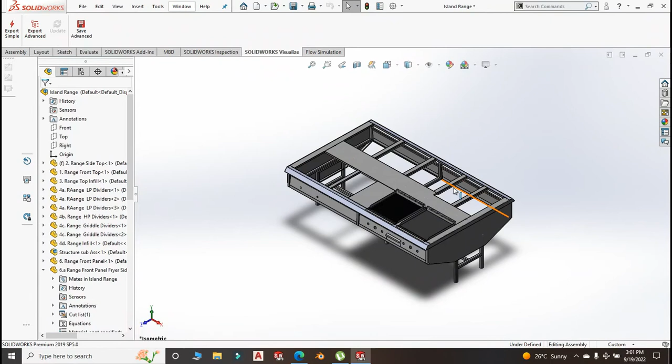For those that are new, we have been dealing with our layout. You can check the previous videos. We are at the hot kitchen, and we are designing this cooking range. As you can see, it's a series of videos, and we have done a couple. We are continuing with the same range, and for those that have been following, you notice a few changes here and there, like these openings were not there.

These are for the gas taps and the opening for igniting the burners and all that. This is a drip tray collecting the oil. I will revert back to whatever you're not seeing, and we shall talk about it.

Today I want us to talk about the double well deep fat fryer. The opening for the well for the fryer is this one, and we are going to be designing the fryer. If I could go to evaluate and measure, we see what is the size. I believe it should be 600 by 540. Measure normal distance is 600 by 540, I believe.

It is always good to be sure of what you're doing. Yes, 540. So having confirmed that, let us go ahead and start with the fryer. We are going to open a new file, then go to part, new part, click OK. My custom units are millimeters, grams and seconds. I've been using millimeters, so we keep that.

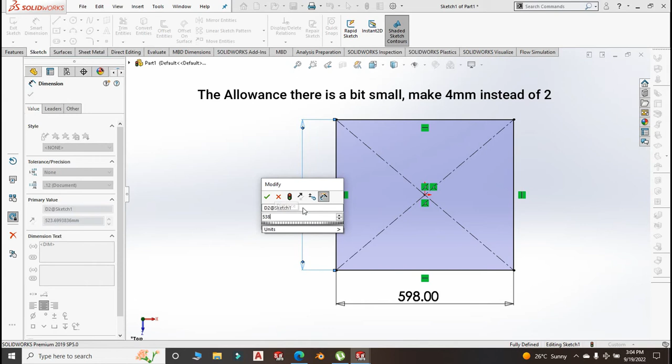Now since the fryer is a drop-in and it's not going to be welded permanently onto the cooking range, we have to make some provision on how it will be supported, and we are going to make an edge flange from here to here. We could smart dimension this. This is 30 millimeter. Also to the front, 30 millimeter, and the other side also 30 millimeter. From the back we leave it as it is.

Now since it is a double well fryer, let us do the partition. The sketch you are seeing here is for creating relationships when we start with the base flange. I did a center line from the origin, then created another line and smart dimensioned it to 15 millimeter. Then I choose the line and mirror it about the center line. Click OK and exit the sketch. That sketch is for the purposes of creating relationships.

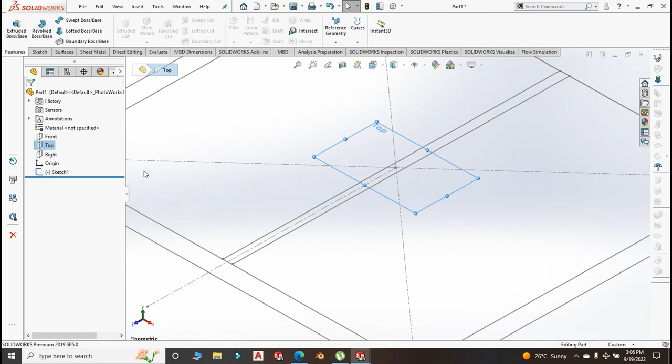Now go back to the top plane. If you want, you can create a reference plane; if you don't want, you can leave it as it is. Once you choose your top plane, start a new sketch. Choose corner rectangle, snap it from that corner to this corner. Then go to sheet metal and choose base flange. In material parameters, thickness is 1.5. The other factors remain the same. Right click to exit the base flange.

Then go to edge flange, choose this edge and this one, and create an edge flange with end condition blind. The depth of the wells will be 200 millimeter. Right click, then again edge flange, choose this edge, that direction, click OK. Then edit the sketch so that you make it collinear with our initial sketch, so that that bend becomes 30 millimeter.

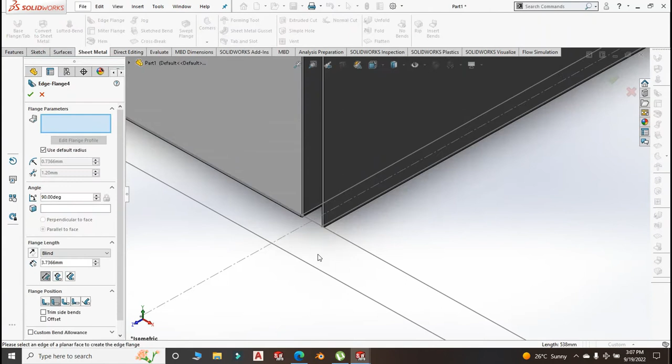That being done, we go back and do edge flange. Here we are creating the wells, and the size of this is 200. If you want, you can select edge flange up to vertex, then choose the appropriate vertex, which I believe is this one. But since we have given it blind and a dimension, that would be okay. The other one, you don't have to worry about dimensioning. Just do a flange, then edit the sketch and make that edge collinear with this. Make them collinear, exit the sketch.

Again, edge flange. We have so many edge flanges we are making here. This you can give a dimension of 200. You want the wells to be uniform. Then do an edge flange on this side.

Don't worry about dimension again. The first stage is helping us with the correct relationships, so that we may keep the dimensions of the fryer. Exit the flange.

Now I think I should have edited it and created the 45 bend that's supposed to be here. I don't know whether that is 45. We can always confirm whether this is 45. It is not 45.

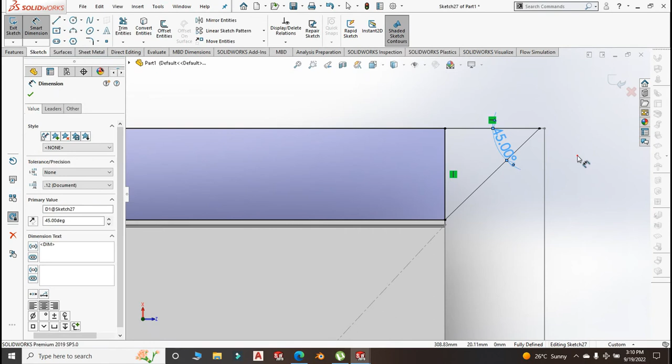Yes. Let us delete this relationship so that we may give it a 45 degree, otherwise we will have problems when we are doing the front part. Yes, that looks better. Okay, so having done that, choose this line and make it construction, then exit the flange, exit the sketch, and your flange is good.

Now choose edge flange again on this side, and this also make it 30 millimeter. That bend that will be there. And finally edge flange here of 15 millimeter.

Most of the time we have been finishing our flanges with that 15 millimeter. So edit this sketch. Do you have to edit? Now create a new sketch here. We want to notch this part here.

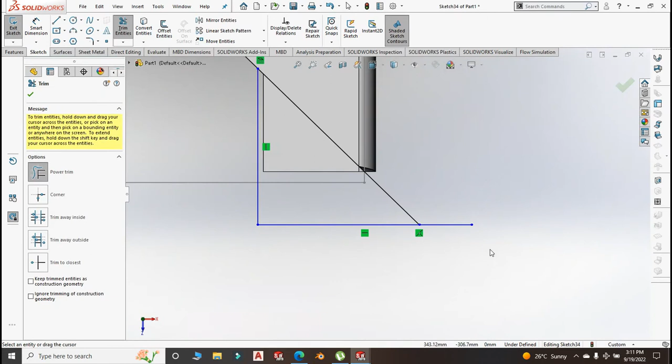You can choose convert entities and choose this edge, not that face, but that. We need the edge, we need only that edge. Right click, then draw a line, select a line from there to there, then choose extend entities, and entity to extend is that. Then right click, choose trim entities, trim this and trim this.

Once that is done, exit the trim, go to feature and extrude, and cut through all or link to thickness or something. Our notch is made of 45 degrees.

Now since we are done with this sketch, you can go ahead and hide it, then choose the right plane, go to mirror, and what you want to mirror is this edge flange, this edge flange, this edge flange, and don't forget also to choose the cut. Click OK, and all that will be transferred to the other side.

Now as you can see, we didn't have to do edge flanges here, we only mirrored what we had here, which is pretty much okay. And I can notice that something is not happening here at the middle.

Let me see. Now this is supposed to be 30 millimeter. I know what happened here, but it is supposed to be 30. I noticed it was a little bit smaller than the other edge, the other bends. Okay, now it looks uniform, right?

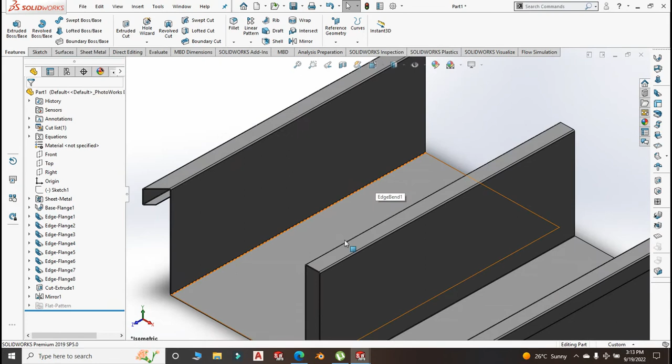Okay, now we go to this and start a new sketch. Choose a center line. Do we need a center line? We can do a center. No, we don't need a center line. Actually, we need just to do a circle.

Circle is opening for the drainage, and make this and the midpoint of this edge flange vertical. Okay, that being made, yes, we need a center line someplace. We need a center line from the origin, which will assist us in mirroring the circle.

Smart dimension. This we can do a hole of dia 20. Ideally it should be dia 25, but I'm going to do dia 20 because I have a 3/4 ball valve, and I intend to use that. Otherwise, much later we are going to make a ball valve of a 1-inch ball valve.

That being done, choose mirror, select the circle, mirror about the center line, right click, then go to feature, extruded cut, and link thickness.

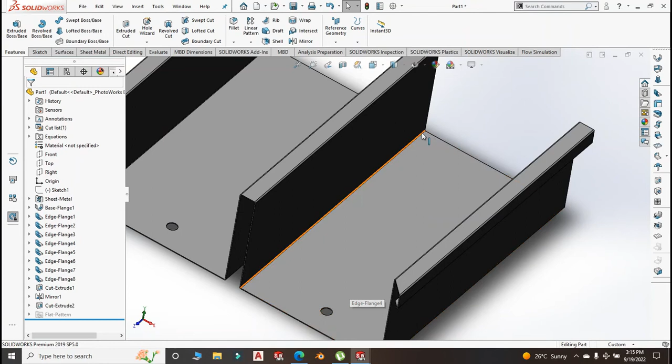The drainages are made. If you want, though this is a small thing, when you're doing your fabrication, before you do all these bends, you can create a kink here and a kink here to ensure that all the oil will be drained from the wells. Okay, but this is a small well, I don't think that will be an issue.

So we save this as part number 1. I have a folder here which I called a fryer, so I save this as part number 1 and name it fryer body.

Then I will go and open a new file and create the front panel. So I'll choose the front plane, start a new sketch, center rectangle, snap it from the origin, then I smart dimension it. This we gave it 598 and the height is 200.

That's okay. Sheet metal, base flange parameters are the same. Click OK. Let us create an edge flange there, 30 millimeter. End condition blind, 30 millimeter. Click OK. Now we edit this edge flange.

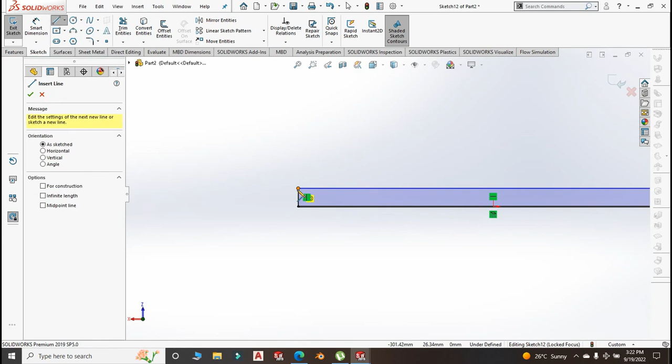Click OK. Now I do my smart dimension and maintain the size of the edge flange. It is 28.5 because of the bend allowance.

Then I make this 45 degrees, and the other side also 45 degrees.

Then choose this line and make it construction. Choose this other line here and make it construction also. Exit the sketch and your 45 degree will be created.

That is pretty much okay. Now go ahead and make the other edge flanges. This is going the downwards direction, end condition blind, size is 30 millimeter. Click OK. Then again edge flange on this side, the 15 mil edge flange, size 15 millimeter.

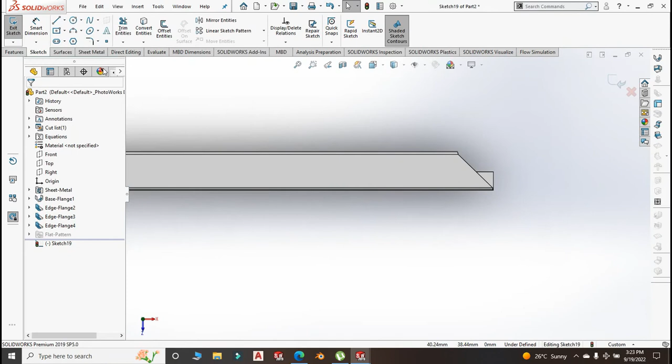Click OK. Now choose this and start a new sketch. Convert entities and convert that edge. Right click, then do a line. You can do a line touching this, like that, like that.

We want to trim, to notch this bend into a 45 degree. Extend the line, right click, choose trim, just like we did with the other one. Same procedure applies. Exit the trim and go to feature, extrude and cut.

Make your cut, and your 45 degree looks pretty good. There is something which is protruding there. I'm sure you can address that.

Now if I could go to the right plane and select mirror, what I want to mirror is that extrude, that cut. That is what I want to mirror. Click OK, and I'm sure it has been effected on the other side.

Now save this as part number 2. Call it fryer front panel.

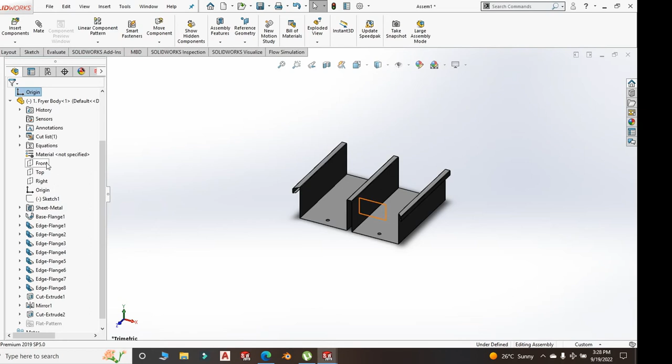We create some mates. Choose the front plane and mate it with the front plane of the working space, that is the front plane of the fryer and the front plane of the workspace. Click OK. Yes, see, I did change the settings.

Now I can do as many mates as I want, unlike what was not happening yesterday. Right plane to right plane. There we go. Now it is in my power to choose when to exit the mate. Fix it. Okay, right click, choose fix.

Insert component. I want to insert the front panel. In the front panel, I want to do my mating, and this mates with this face here, because there is where you're going to do your welding, and the top of course is flush with the other bends.

Now I choose the right plane and the right plane of the front panel, the right plane of the front panel.

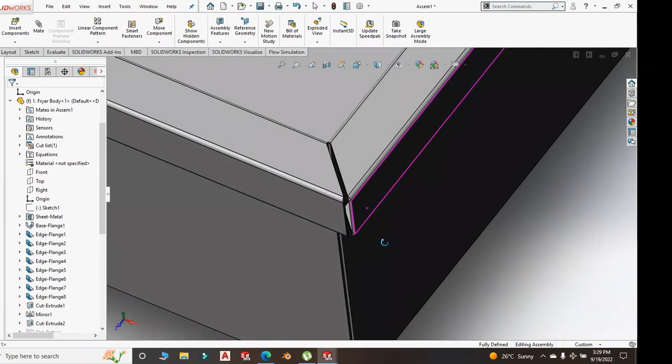That's good. Now the reason why when I'm doing these things I don't do each part alone is because of this gap. See how big that gap is. I prefer doing the component all together.

Then when I'm exporting parts, when I'm exporting the parts to be cut using the CNC, the flat pattern, that is where I will separate them on AutoCAD.

But hey, I know you can fix this, and you should know how to fix this, because if you were to do your welding with such a big gap, you are going to have a terrible welding and the finish won't be that nice and smooth.

Okay, and I'm wondering why this is not coming to, why there is a small gap.

Can we open this and edit the sketch of the base flange and make it 600? We see what happens. 600. We want to see whether it will fix that and the gaps and all that.

The gap is still there. Actually, that panel has become slightly bigger.

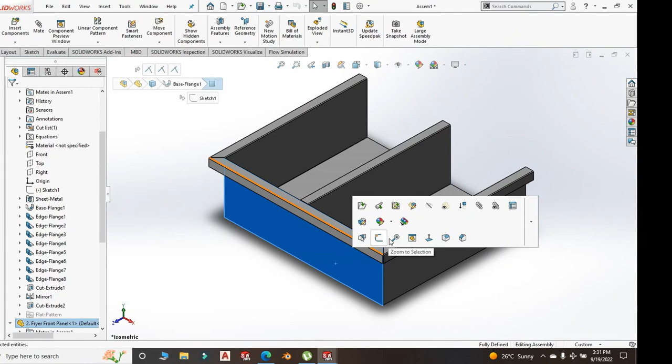But when you're doing your fabrication, you know, you can't stay away from the grinder. The small, is it 6-inch or 4-inch grinder? What is the size of that grinder? I forgot.

598. Let us keep it as 598, as the others.

Okay. Now with the assembly, I'm going to save this, save all, and save it as deep fat fryer. You can call it whatever name you feel appropriate.

Now let us go ahead and do the back panel. The back panel, we choose new part, click OK, go to front plane. Front plane, start your new sketch, center rectangle, snap it from the origin.

Smart dimension, this should be 598 and this is 200. Sheet metal, base flange, parameters the same.

Exit the base flange, choose this face and start a base flange or a tab if you want. Now choose a corner rectangle. Don't snap it anywhere because we will create relationships.

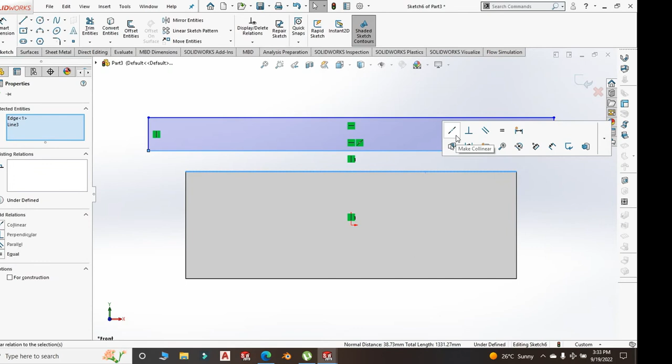Choose this point and the origin and make them vertical. Choose this line and this edge here and make them collinear. Then smart dimensioning this and this to 30 mil.

Not 300 but 30. I hope that will be the same on this other side. Now exit the sketch and make sure you merge the results. That's good. There you have your tab.

Something we didn't do there, we did it very fast. We should have dimensioned the height of the tab, which should be around 100 or 80 mil. 75, 100, that would be good. Exit the sketch.

Now choose edge flange from the top, and the edge flange is at an angle of 30 degrees. I find 60 to be too sloppy, so 30 feels nice to me. And the end condition blind 75. It's a good size. Right click, exit the flange.

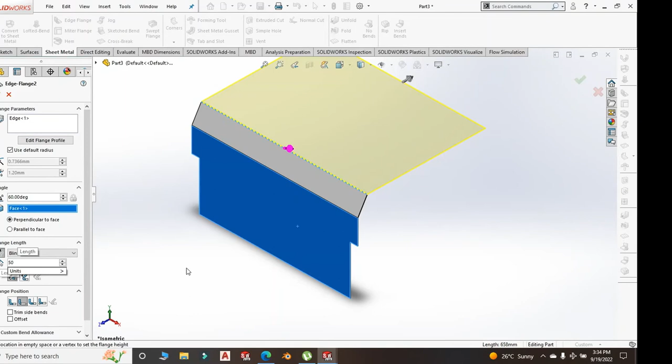Another edge flange going in that direction. Make sure it is perpendicular to this face, not parallel, but perpendicular to that face, and make end condition blind. Make it 50 millimeters. That's 2 inch. That's good.

Then choose edge flange there, and this should be 15 or 20. I think 20. What do we intend to do with that? Yes, there will be some holes for some screws for the panel, hiding the electrical connections. Okay, finally do your edge flange here of 15 mil.

Click OK. Now I want to do some openings here, so I start a new sketch for the heating element. I choose center line, then I will choose a circle here and do a circle here.

Let me first smart dimension from here to here. Didn't choose dimension. I think this should be 300 or 299, so I'll do another center line somewhere here, then smart dimension the center line from here to here, do 299 over 2, so that the center line will be at the middle of that wall.

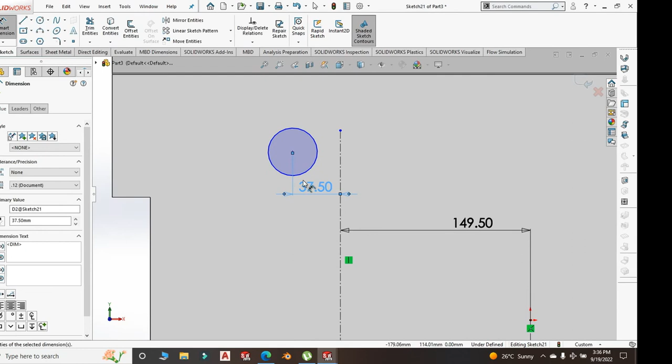Now the heating element should be at least 75 millimeter, not at least - well, your electrician will sort you out as far as that is concerned. Mine, I'm going to keep it 75, so I'll choose 75 divided by 2, and the diameter of the heating element, why am I calling it copper?

The heating element, I will keep it as 8mm. I'm not quite conversant with heating elements and their sizes and all that. I will take a look at it when we are doing our next installation or something like that.

Choose the circle, mirror entity, and mirror it about this line. Then choose both circles again, mirror, choose this circle and this circle, and mirror them about the center line from the origin. Now also here I will do a circle.

I'm not sure whether this circle will work. No, let me finish with whatever I have. I don't want to end up getting confused and repeating or doing some other things. I extruded cut, link to thickness, click OK. Now those holes are for the heating element.

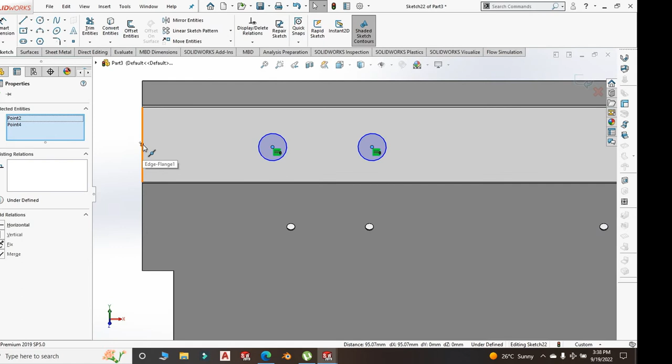Right, now choose this edge flange and start another sketch. Here is where your basket holders will be, and I choose those two holes, make them equal, then choose the centers and the center of the edge flange and make them horizontal.

Then I smart dimension. No, I think I should do a center line here. And that center line is the same as the other center line that we had created previously, that is 299/2.

Then between this and this we make it, the basket holder can be of dia 70, not dia 75, but the distance should be 75/2. So is this other hole here.

And the holder I'm going to make of a rod of 8mm. Diameter of the holes will be 8mm, the rod, right? You can do 10 or whatever you have.

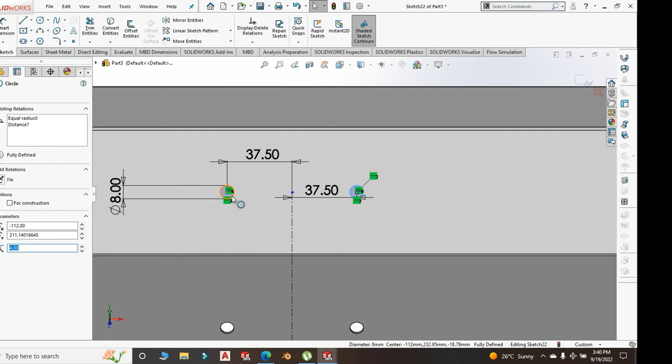Okay, center line again, and select this circle and this circle and mirror them about this center line. Click OK. Go to extruded cut, cut those holes, and you are good.

Anything else to be cut there? I don't think so. Now let me save this as part number 3, which is fryer back panel. Notice that I'm not just saving as back panel or something like that, because in our main assembly of the cooking range you might find that you have other parts that you had saved as back panel or front panel or things like that.

And if you have 2 or more different components bearing the same name, when you are doing your assembly you will have all sorts of issues. So it is good for you to make sure that each part has a unique name. I'm doing assembly, that to that.

Then this part here will be not flush, if you want, to that face. Then I will choose my front plane, right plane, and the right plane of the back panel. Mate it like that. Now the fryer is taking shape, which is good, which is very good. Exit the mate.

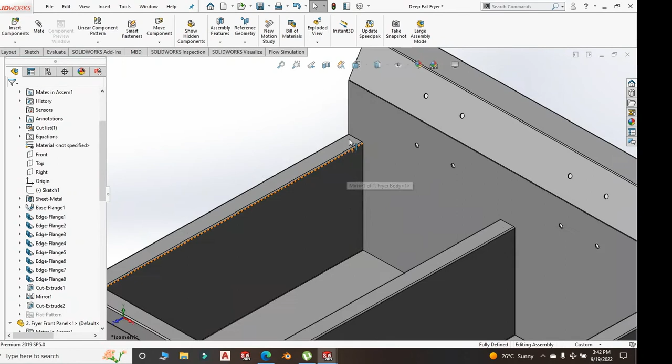And now real quick, you will do your welding here, welding here, welding here, and welding here. Nice weld here and nice weld here also. The other welds, here you will do welding, and here, and on this other edge. Now here you can do a very nice weld and make sure that the weld doesn't penetrate inside. Also this corner and this corner.

If you want, you can notch this. You can notch, see the lines, see the two lines. You can notch the back panel and weld this independently from the outside, making sure that no welding will penetrate inside the fryer, because you want to make sure that your fryer is neat. Remember, this is something that will be cooking food directly. It's not like you're going to have a pan inserted in here.

Even though there are the baskets which will be holding whatever you are deep frying, still the frying medium, which is cooking oil, will be in direct contact with the fryer. Okay, so you need these joints to be very clean and very neat. That one you must be sure. So the welder that you're using, make sure that it is top class.

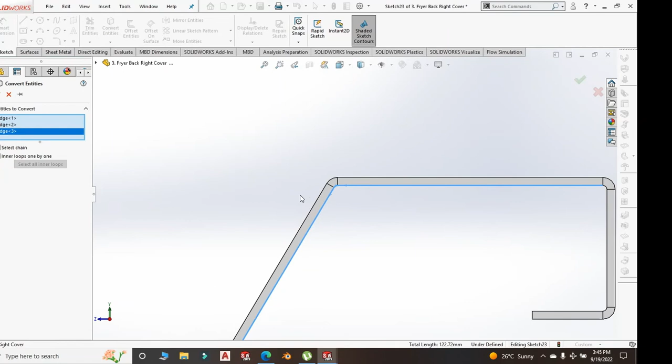Okay, now you don't do this, okay? Please don't do this. I want you just to make sure that you can see what I'm doing. You can create this part on your own. Don't follow the lazy man's way of doing it. Though it is accurate, do not follow the lazy man's way. I'm converting entities and I want to convert all these edges because that cover should fit in here. You can also take the dimensions and instead of following the lazy man's way, you do it right.

Okay, that and this, then click OK. With that done, let me choose line and do my line from here up to somewhere, then to this point, click OK, then choose this line and make it vertical. Now as you can see, there is a 30mm bend here which also needs to be covered, so we are going to edit it in a short while. Exit the sketch, choose one edge flange here and hide it. It hides everything else. That's why I was calling this a lazy man's way of doing things.

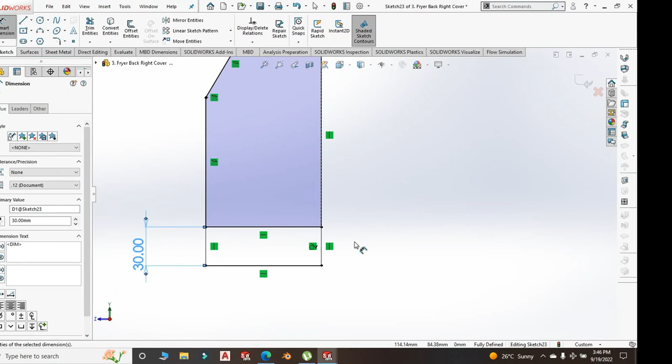Now choose the sketch and edit it. Do a line from here to here to here, then here. Okay, smart dimension this, make it 30mm. The bend there I believe is 30mm, the edge flange that we had created earlier. Then select this line and make it construction. Go to sheet metal, choose base flange, and there you go. You have that piece that will be covering the back, the opening.

Okay, with that being done, create an edge flange here of 15mm, 15 mil, click OK. Now, why was I calling it a lazy man's way? See what happens if you decide to get a flat pattern from it. It will give you so many errors. See, you can't export this, you can't save this as DXF. I don't think that you can. Well, we can try and save it as a DXF file and see what we will get out of it.

I don't think that it will give us something nice. Bend lines, flat pattern. See, it is giving us, I don't know. Let's see what we get. See, this is very much inaccurate. You export this and start cutting this from your CNC machine, you will have something which is very terrible.

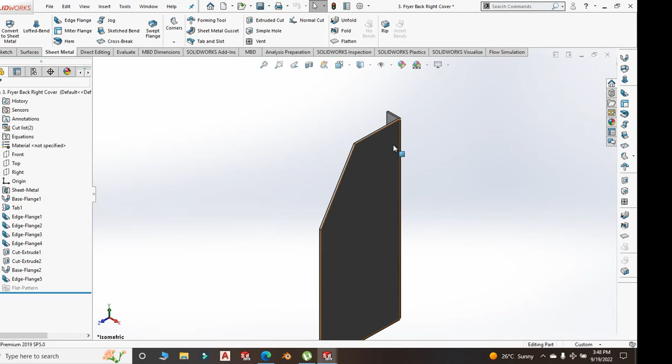So don't do that. I know you know the right way of doing it, so please follow the right way, which is to create a sketch on its own, give it the correct dimensions and all that, get your base flange, edge flanges, and you're going to get your flat pattern. Okay.

Having said that, let me first close what I don't need. I don't need that. I don't need these. I don't need this either, but I sure need the cover. For the cover, let me continue with the assembly and insert the cover. Then we do some mating. This is flush with this.

This comes slightly there. Then this face will be touching on this face. Click OK. That mate is complete.

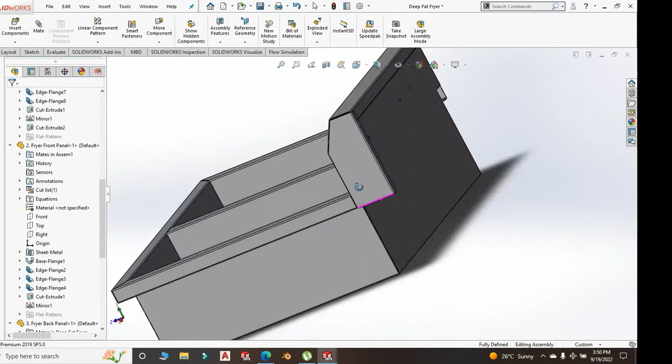Now, as you can see, the fryer is well covered, and here you will do your welding. You don't necessarily have to do full welding here. You can do nice long stitch welds there. Now, the purpose of all these is where you're going to put your electrical components, your conductors and cables and what have you. And also the heating element will be protruding. The connection will be from this side, and you want it protected, don't want it exposed.

Now we can't mirror this because of this degree. If we mirror it, the degree will go to the other side, and the bend, the edge flanges will be on the other side. So what do we do? We open the part and save it as a copy and open, and call it left cover. Left cover, and this will be part number 3A. Save. Then everything remains the same.

What we are going to do is select this bend and edit the bend, just change direction. Same applies to the other edge flange. This edge flange, select edit, change direction also, and your left cover is good. Save and go back to the assembly, insert component and insert the left cover. Left cover, that's nice.

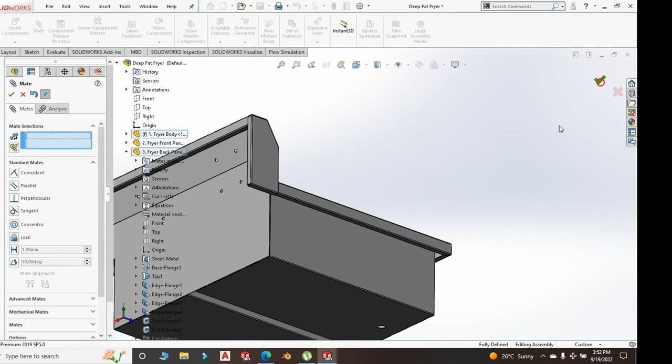Now do the mating, select this face and this, right click, this face and this face, right click, this face and this face, and right click, then exit the mate. That is very much good and in order.

Now let us do the cover. The removable part, which will be bolted on this edge and on this other side, and we might be having a problem. Our covers are slightly bigger. That is why you are seeing the edge flanges overlapping. You just need to adjust the dimensions slightly. Now, what is the measurement from here to under here? That is 199, around 200. I'll do 200. Let me note it someplace.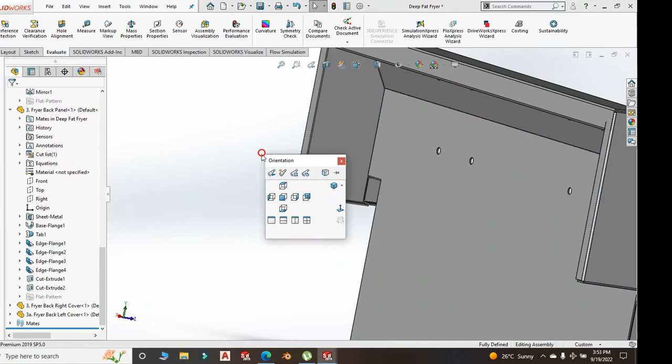The height is 200, and from here to here, that should be 617, 618. We round it off, and the depth should be from here to here. It's 87, 88 depth. Okay, let us go ahead and create that part. So I'll go to File, Create New Part. Okay,

front plane, new sketch. You can hear a lot of noise from the background. Kids have taken a break from school. That's why you can hear all the shouting and the hullabaloo, they are playing.

This we saw is 618, so we give it 2mm allowance. We do 616, and the height here is 200, so we can do 198, and go to sheet metal, base flange. Since the length is a little bit big, you can maintain 1.5mm, but should you have an offcut of 1.2, that would be good. This we saw was 88, we can do 86, and condition blind 86.

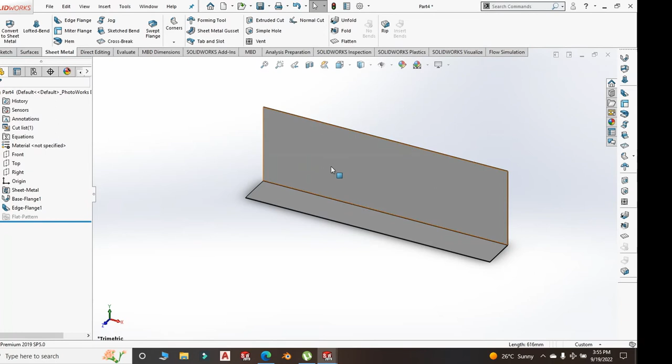I don't think there is anything else required to be done from there. The only thing that you will do, as per the instructions of your electrician, is to make provision for the electrical cable, the loading cable, the one that you will be connecting to the socket. So I'm saving this as part number 3B, back electrical cover. These are just names. Save. And I will go to my fryer and insert component.

Where is my fryer? Actually, I should close this and this, and be left with the fryer. Insert component. Back electrical cover. That's nice. Now mating it, this face here will be flush to that face, and this will come absolutely under these other faces. And this cover you can do differently from how I'm doing it. Then go for the right plane and the right plane of that back cover, and mate them as shown.

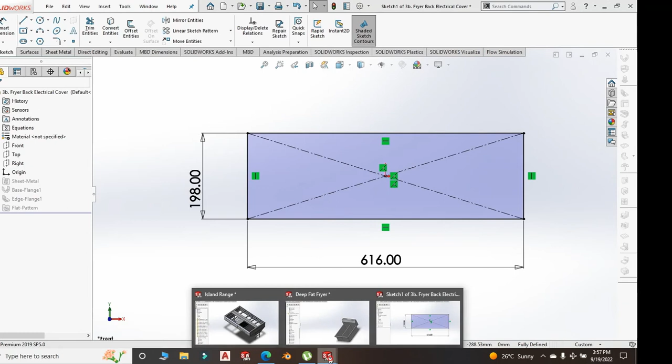Exit the sketch. Now, why is it a little bit shorter? We open it and edit the base flange. I think no, we are supposed to edit the sketch. 616. It shouldn't be 616, because the other was 598. Will it allow us to go back here and do some measuring? Okay, don't worry, I don't need it. I can't access it. This dimension was supposed to be 598 plus 60 minus 2.

You're wondering what kind of guy is this who doesn't want to do some little calculation, very simple calculation like that. But I don't believe in it; why should I struggle, getting my head tired, while I can use the tools that have been provided by SolidWorks? Now the size is good.

So what I was saying is, you punch a hole here, put an insert, another one here, insert, another one here, insert, and another one here, insert, and do screws. Okay, screws, because that panel will always be removable in case you want to do your maintenance and all that. You will need to have that panel removable. You can't weld it permanently.

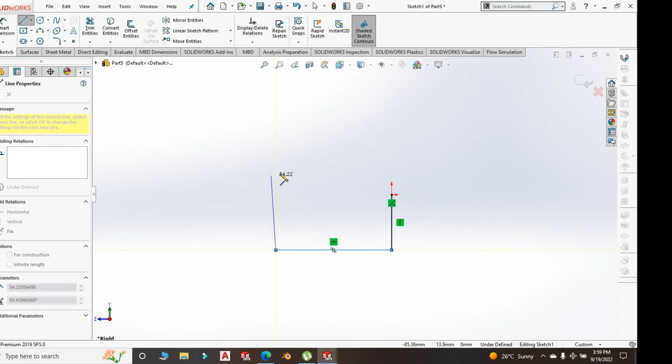Now, with all that done, let me close this. With all that done, I want to create the outlet for the drainage. I start a new part, click OK, and I will choose the right plane, start a new sketch, then do a line here from the origin, make it vertical, then horizontal. Now this is an elbow. Let's smart dimension this to, we can do this 30.

What I'm trying to say is that this elbow, you will be required to weld a socket at the end. The elbow will be welded under there to the wall, then a socket at this other end. I don't want to do a socket here, so I will do one elbow, then create internal threads, which will serve as a socket. But I hope you have gotten the concept there. Do a socket there and weld it to the elbow. This, I'm going to make it 100 millimeter because of the socket. And again, I don't want to do a very long nipple. There will be a nipple coming someplace.

Now this, I will fillet this, and since the hole we created was dia 22, which I believe we don't have that. I don't know what is the size of a 3/4 elbow as far as the thickness is concerned. I will also check on that. So I will radius that to half the diameter of the elbow, then exit the sketch because I want to do some sweeping.

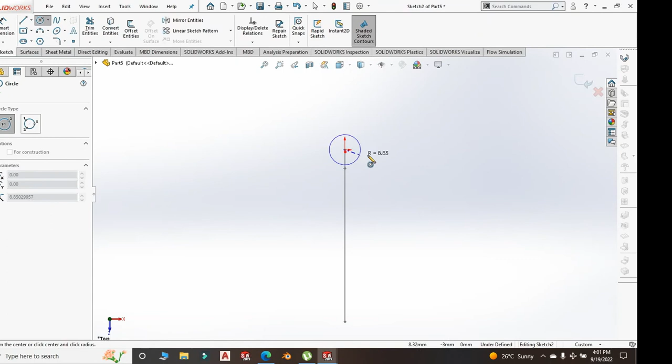Go to the top plane and start a new sketch. From the origin, I create a circle, and the diameter is 22. You don't worry about this part. These are fittings that you buy from the shop, from your supplier, and you know the diameters are fixed. So if you find my dimensions not agreeing with yours, use the appropriate dimensions, okay? Because when I'm doing the drawing for fabrication, I make sure I incorporate all the fittings that I'm going to be using and ensure that I keep the dimensions.

I'm sweeping this, and this is the sketch profile that I will be using, and this is the circular path. Right click. Now it has to be hollow, so shell it. Thickness is 1.5. Select that face and this face, right click, and you have your shell. Now go to Hole Wizard, select thread, and your threads are starting from here, and you can give it blind of say 20 millimeter. And do you want to offset? Change direction so that you may have a nice start to the threads. You can offset 5mm. This we gave it 20 so that we may have 15.

The thread, I don't know, nipples have threads of what, M10 by 1. Thread size. You don't worry about these small items. We will do 1.5. We are going to have issues because the thickness there is 1.5, so let us do 1mm. M10 by 1 or 1.25, whichever makes you happy. Inbuilt errors. What are we doing? Metric die or metric tap? They should be metric die. Unable to cut surface. Use extrude. No, I don't want to use extrude there. I don't want to do that.

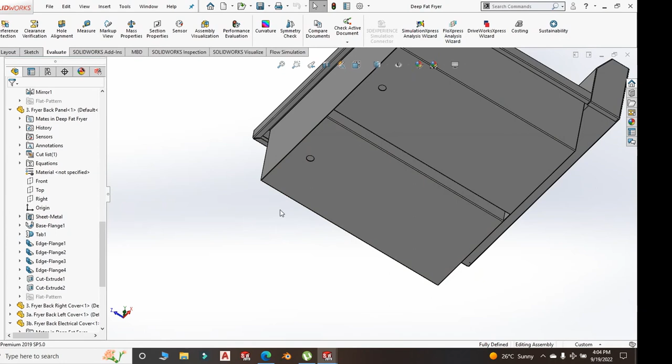Okay. Now before I do the threads, I will do something here. Instead of doing a socket there, you guys assume here is the arrangement. Let me start from there. You have your elbow, and your elbow will be welded to this. After the elbow you have a socket which will be welded to the elbow, then a nipple, then a ball valve, then a nipple, then another elbow there with a socket.

Now you can avoid all that by doing what? By getting a tube, a schedule pipe, do threads on one side, and the other side cut it and weld it directly to the elbow, so you will avoid so many fittings there. So that schedule pipe will be your nipple, and the threads are the ones that you're going to tie your ball valve to. So let us do exactly that. I'm going to elongate the sketch, edit the sketch, and make this 150, so that I may create external threads which will act as the nipple.

So I'll go to the Hole Wizard and select threads, and instead of having them as internal threads, take them outside. And don't think that I'm doing this because I wasn't able to make internal threads. I really can make internal threads. I'm sure whatever kind of threads that I was choosing here wasn't in agreement with my tube. If I could change the threads, you could see them being in agreement. Okay, is that clear? This we want to do 20.

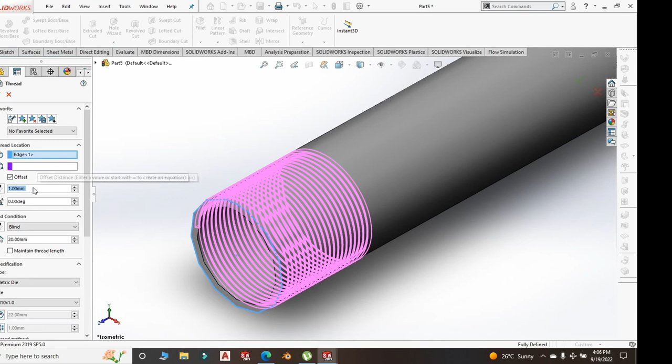Then we have offset this thread by 5mm. We change direction. Yes, let us change direction like that. And then here we will use metric. Is it metric die or metric tap? Metric die, and that will create our threads.

Now, if you can see why we were offsetting the threads from outer, so that you may have a good start for the threads. Now go to the end, select this face, start a new sketch there, then choose convert entities, choose the face, and convert those edges, all those edges. Then go to feature, extruded cut, and cut through all.

Okay, through all, and you will have a nice finish to the threads. And that part is done. We save it and call it as part number 4, which is fryer drainage elbow, drainage elbow 1, because we are going to have another on the other side.

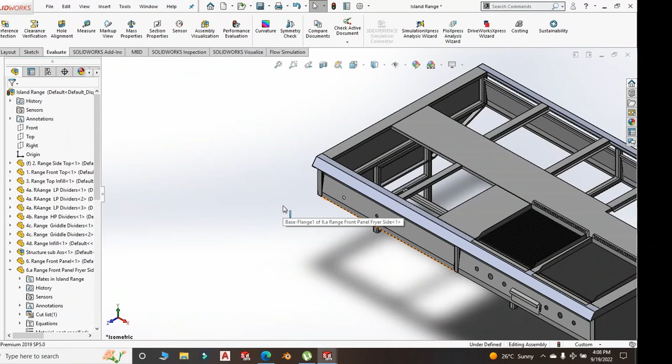What is the length? We did 150. That will be determined by the distance from here to this panel, because once you do your ball valve, you don't want the ball valve touching the edge. There should be some clearance for you to be able to open and close the ball valve. Okay, so we go back to our assembly

and insert component, and the component we are inserting is drainage elbow. Okay, then we do mating, and the first mate we are going to do is concentric relationship, and choose this and choose the hole and make them concentric. Yes, then choose this top part and the weld face, choose okay. You're going to do your welding there.

Now let me exit this first and choose the body part, or I can choose the back panel and open it, then create reference geometry, which is plane, right plane, reference plane, choose plane, offset it, flip offset, and this was 299 divided by 2. 299 divided by 2 comes to what? 299 divided by 2, that is 149.5. 149.5.

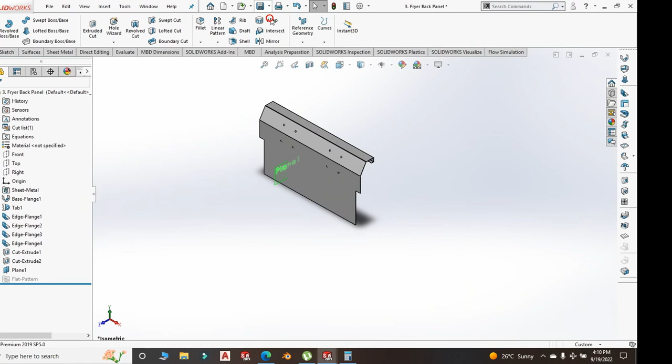Yes, I believe that should be at the center of the hole. Now we can hide the plane, then go back to our assembly and do mate, expand this, go for the fryer drainage, choose the right plane, then go to the back panel, choose plane 1, and you mate them. So when you are doing any other mate, this tube won't be oscillating, there will be zero movement there.

Now let me insert something here that you have not seen me design. We will design it some other time, and that should be the elbow, not the elbow but the ball valve. I have a 3/4 ball valve that I did a couple of days ago, if not months. There is my elbow, why am I calling it elbow?

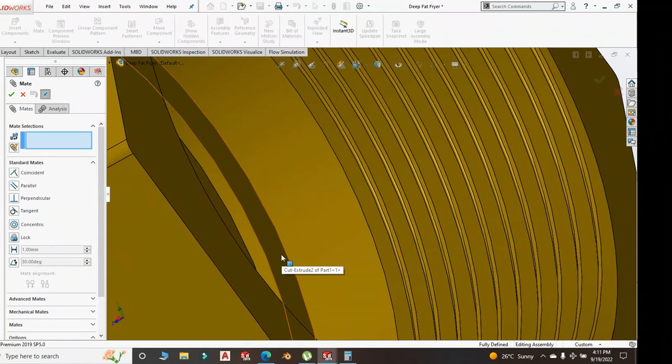Mate this, and the first mate I'm going to do is to ensure that my threads are coming all the way to somewhere there, that one and this one. Okay, what kind of mate was that? Then I need to do a concentric. That I did. I don't know whether I did it right. No. Actually, I should just cancel the mate, exit the mate.

So let me first do a concentric mate. Concentric relationship between this, can do this, and this tube. They are concentric. And let me pull it like this, and I can choose. Can I choose distance? I can choose distance. Yes, I will choose distance.

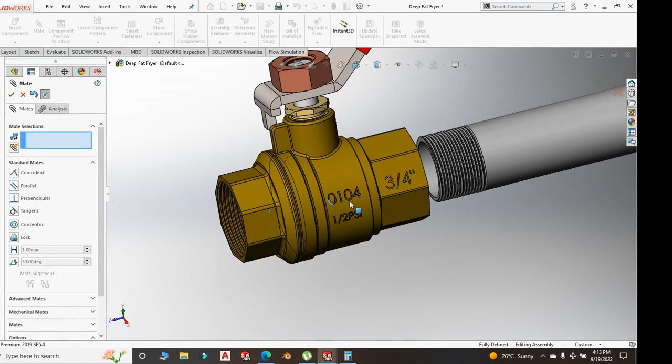I'm wondering, distance 15 from here, from there to here. No, 15. 15 is small. 25 is not good. 25 is big. 15, the threads are inside. The threads have gone inside very much.

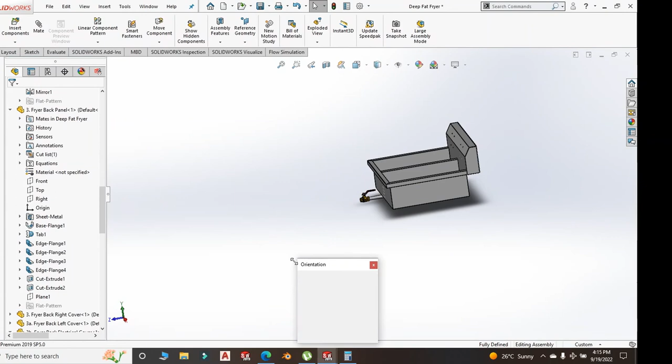Now, before we continue much with so many other things, let us bring this sub-assembly to the main assembly and see whether our distance, this length is good. Okay, so I will go to the cooking range and insert component, and component to insert there is the fryer, all of the fryer. Then I will do my mating.

The first mate is, I will do an advanced mate and choose width, that is between these and these. Should be at the middle of, not at the middle, should be here between that and this. Okay, now that being done, let me ensure that I have only 1mm distance between this and this.

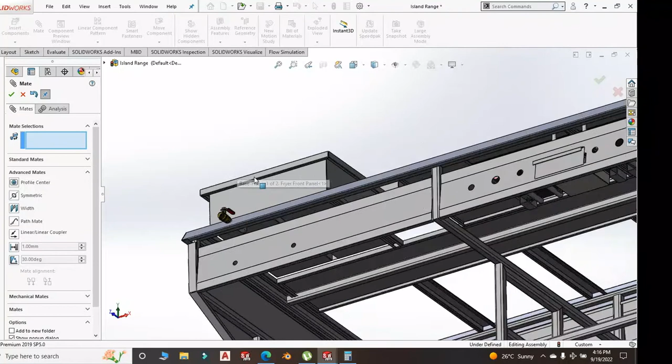Just an allowance of about 1mm, 1 or 2mm. Now, finally, this will be our support to the fryer. It will be resting on the top of the cooking range. Did we choose right? No, we are not supposed to choose width, but standard mate and make that coincident relationship. That is good.

Now, don't worry about the holes. The holes, we are going to redo them. If you can see, our nipple is shorter. It's short. The handle of the valve is almost touching the front panel of the range. So we will go back and open the elbow and nipple. Then we go to the sketch, edit it, and make this 200.

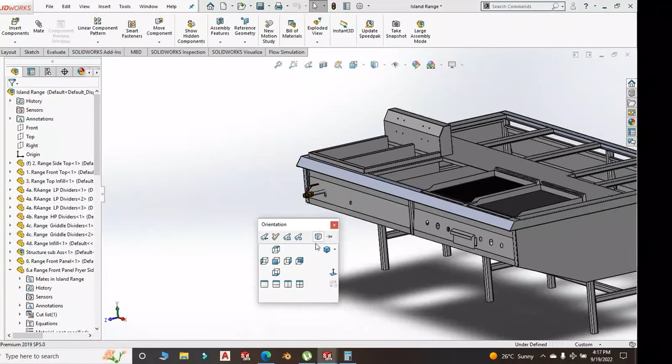That is why I was telling you, this distance will be determined by this, the distance between there and the fryer. Now you see your elbow, your ball valve; 200 seems to be a bit long, but it is not bad. If I could choose from this angle, you know, it is not bad. It won't be interfering with any operations. Okay, now that is good.

Now, I said don't worry about these holes, we will redo them. We need to do an elbow. One thing I should mention here is that when we are importing the deep fat fryers, we normally import them and do some little modifications, like removing the legs, because most of the time they bring us freestanding fryers, so we remove the stand or the legs and use them as drop-ins into our cooking range. Most of the time those fryers come with no elbow here.

Imagine a situation whereby the operator, the chef who is using the kitchen, has finished and they want to drain the oil. The oil is super hot, and if they open the valve and they are standing somewhere here, most likely the oil will come to his body, and that can be really dangerous. So to avoid that, please do another elbow here and direct the oil towards the ground. At least here you have high chances of avoiding accidents. Okay, so I will do an elbow here.

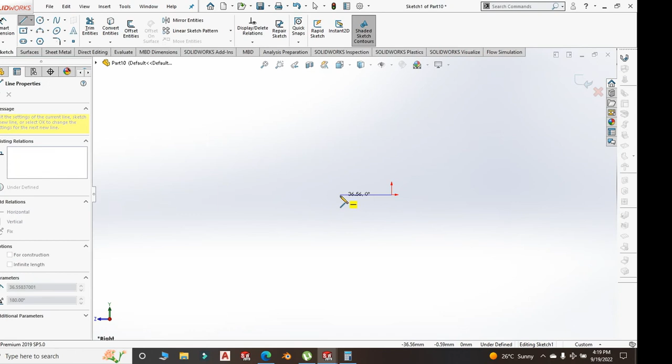I create new part, select the right plane, new sketch, and this elbow also, remember, it has to have a nipple welded on that side. I don't know whether there are elbows which have nipples. This we can do 50 and 30. Then we do fillet, and the size is 11.

We didn't check whether those dimensions are in agreement with our nipple, our ball valve. We will check, then start another sketch. Which plane do you need? Front plane, start new sketch. From the origin, do a circle, center of the circle from the origin, diameter of the circle is 22. Exit the sketch again and feature sweep, and what you're sweeping is this sketch here. Do they make a difference? Yes, a big difference. Let me clear this.

So the first sketch is this. What's not happening here? I want to select this. Why can't I select this line? Yes, then this. Yes, there you have your elbow. Now shell it again. 1.5, it's the thickness. Choose this and choose this. If you don't choose both pieces, it won't be hollow, it won't be open.

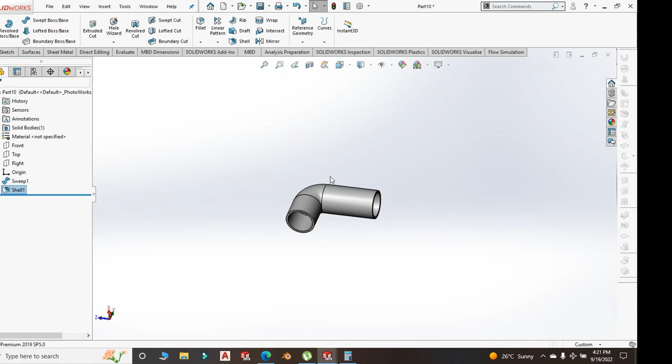Then go for hole wizard thread. Your threads should start from here, just like we did the other, and offset here by 5mm. Change direction, and I believe you are good. M10 by 10 metric die, you're good. If they are not matching, this is just for representation of what we are doing. Like I keep saying, your components, you get them ready. This is elbow 2. Save and rebuild.

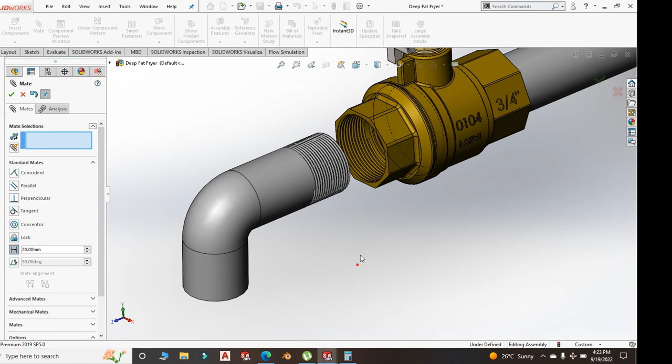Then we go to the assembly of the fryer. Insert component, and component to insert, there is elbow number 2. That diameter is way too small. We'll change it. Now mate. First mate is concentric relationship between this and this. Yes. Then we can do a distance of 20 between this face and this face. Flip dimension. 20 is big. 15 is good. 15 looks good.

Click OK. Then go to that plane that we inserted, that is plane number 1. Where is plane number 1? Plane 1. And where is this elbow? Let us collapse this and collapse this and go for that. Yes, it has made it vertical. Now remember, you need to use some thread tapes as you do these fittings.

Let us change this to, let me see, edit. Can I edit that? No, I don't need to edit it. What if I select this and start a new sketch? For the purposes of getting this diameter, the diameter of that circle, will I ever get the center?

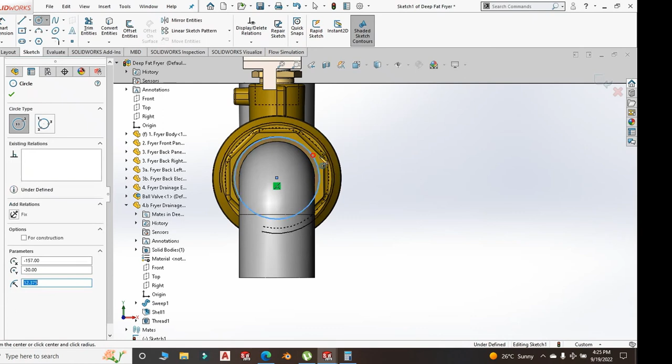Yes, let me get this diameter, 24.75. Exit the sketch, don't save nothing. And open this.

Go to sweep, sketch number 1, edit it. And this radius should be 24.75 over 2. Exit.

Then go to sketch number 2 and edit it to make this 24.75. We didn't even give allowance, anyway, you know what we are trying to achieve. So save this.

Then we go to the main assembly, the sub-assembly, and the elbow is fitting. Yeah, so ideally, that is how the fryer should look like.

Now I will do this holding basket brackets, new part. Okay. Then I choose, how we select front plane?

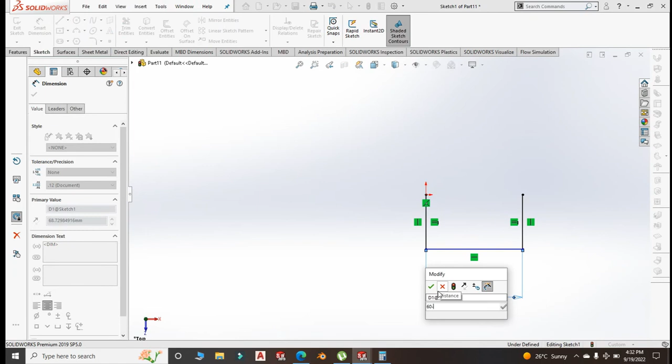Smart dimension. This, remember our opening we did at 60, and this should be something like 50 millimeter. Then fillet the radius, and fillet radius is 4 millimeter because the rod is 8 millimeter.

That in this, click, right click, exit the sketch, then choose right plane, not right plane but front plane, start new sketch. From the origin, circle, do a circle of diameter 8 millimeter.

That is the size of the rod that you're going to use for that holder. Exit the sketch, go to feature and sweep.

Sweep this, the first sketch. No, why is it that I'm missing that sketch and this? And this should be solid.

Save it as part number 5, call it basket holder. The A should be smaller.

Now insert component, close this, save all. I'm closing that and I'm closing this, I don't need them, I don't need also this. Then I open this and insert that holder.

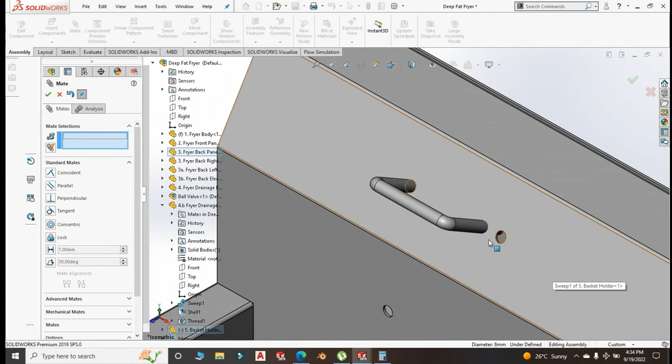And if you want, how much did we do the hole again? We will go back and see how much we did for that. Let me first hide this so that I may see where my rod is coming.

And mate this face and this, because you are going to weld your rod from here. Now that being done, let me also choose concentric relationship between this and this.

It won't work, it won't work, it won't work. Let me first make sure that I get that whole dimension of that hole. What did we hide?

This part, make it visible. Make it visible. Then we can choose this and edit. We can edit it from here, and what we are editing, where is it?

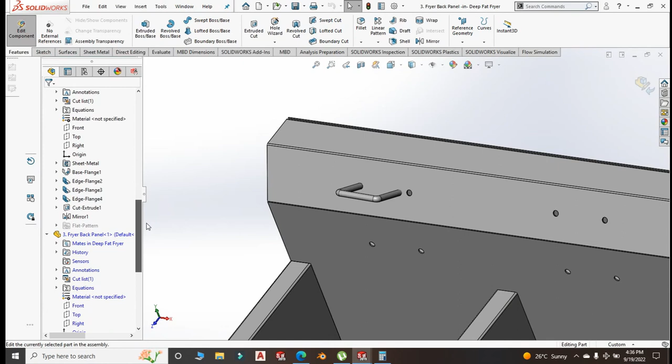What are we editing? Back panel, extrude and cut 2. That we edit the sketch. We just want to know the dimension of that sketch.

37.5, that should be, is it 75? 37.5 times 2 should be 75 times 2. What am I doing?

37.5 times 2, 75. Yeah, I think 75 is ideal. 60 looks small. 75. Exit the sketch, exit editing, then choose this.

If you want, you can edit from there. You don't necessarily have to go and edit from the part. Make this 75. Choose OK, save the changes, go back.

Now you see it is at that center. Now choose Mate and make those two components concentric, that is between this and this, concentric. Yes, that's good. What else can we do?

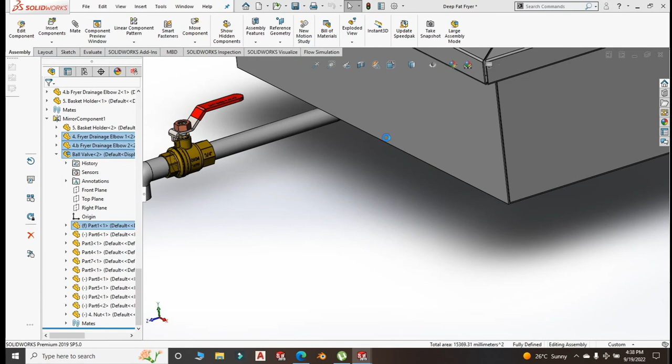So let me choose this and this and delete them. I will insert them again and do the mating, the necessary mating.

Now the remaining thing here is the heating element, that is what we are doing next. Part, choose OK, and here we will go to 3D sketch. This 3D sketch, last time I tried doing a 3D sketch, I encountered all sorts of problems.

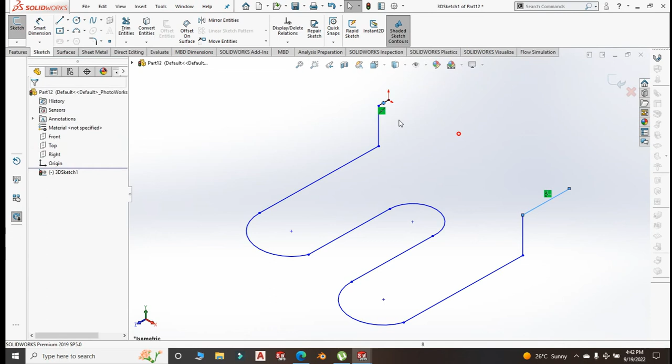And finally, like that. Let us see. Yes, it is good. Now I choose this line and make them equal. Then I choose this line and also make them equal. Then I choose this and this, make them equal. Then this and this, make them equal. This line and this, sorry, it is this line and this, make them equal.

Then I start my smart dimension. There is something I can't remember. Let me do this at 230. Then this at 400. Then this I do 300. Then this I do at 20, then this I do at 15.

Like I'm saying, what is this now? That should be 75. Not really. Now instead of making this 15, let me delete it and make this 75 from here to here. 75, that is good.

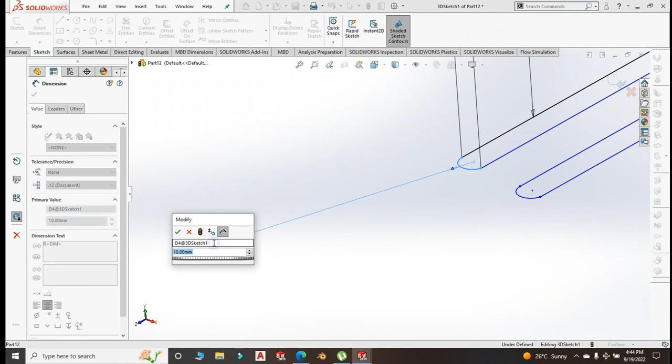I believe this is big, that is why we are having that problem. 10 is big. 15. Yeah, let me keep it like that.

I exit that sketch, then I will go for the front plane and start a new sketch. Circle from the origin, diameter of that circle is 8 millimeter. There is one dimension there that I will edit once I confirm the opening of that hole for the element.

I also did the 3D sketch. Let me edit. I didn't dimension this, I should dimension to something like 100. Also, since I'm in edit mode, I fillet 4 millimeter, that is between this and this, and this, and this.

Right click, exit the sketch. Now I go to feature and sweep, and what I'm sweeping is this circle and that sketch, and the heating element is there. Let me save this. It is not that perfect, okay, but I believe your electrician will help you with this. This is just for the representation.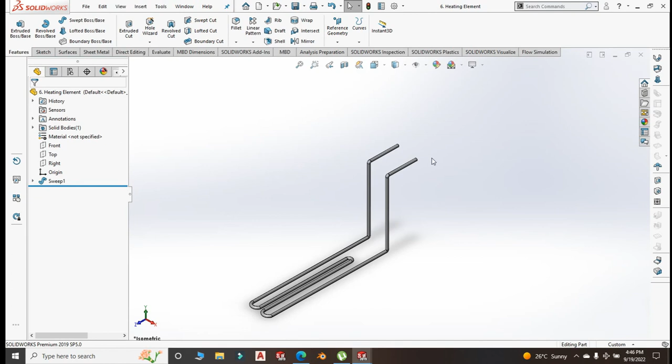Element. Now let us, and you know there are some funny things that are normally here where you come and do the connection, termination of the cables.

Now let me insert component, and the component to be inserted there is the heating element. We will check whether the sizes are good, and concentric relationship as we do the mating, that is between that and this. That's right. Concentric again between this and this. Is it so?

Clear. Delete. No. First of all, let us leave it at that. We choose this. Shouldn't have done it like that.

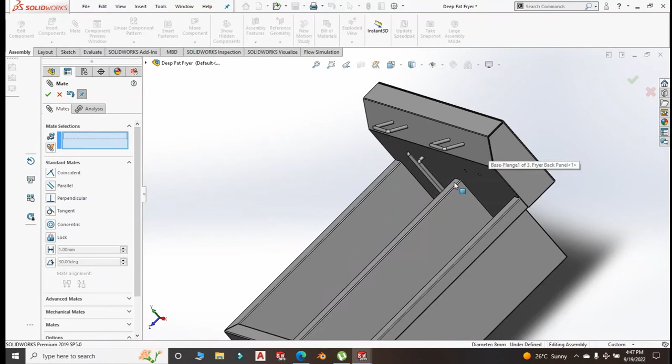Mate, and I will give it a distance of 10 millimeter between this and that. Should be 10 millimeter, about 10 millimeter or something like that.

Now the size of the element looks a little bit small. Yeah, you can increase this to say 100 or 120 so that this might expand a little. Okay, let us do that.

Select this, edit the sketch, cut 1, extruded cut 1, edit that to that, this and this 75. Let's make this 50. Yes, exit the sketch.

Then once that is done, we choose this, open it, go to 3D sketch and edit. We edit this from 75 to 50, to 100, sorry, 100. Yes, 100 will do. Then we can make this 25.

25 is way too big. 20 looks okay. Looks okay to me. No.

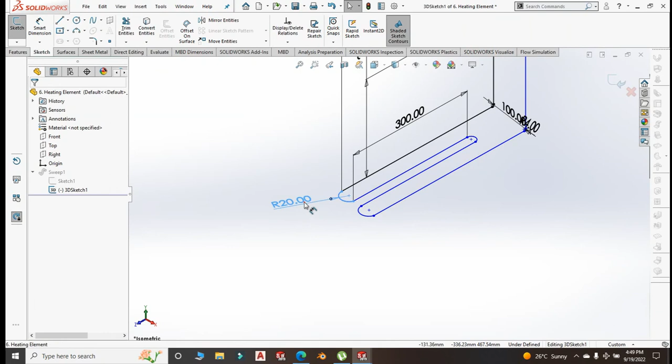Let me, what if I choose this and this and make them equal? Any harm? No harm. Actually, it has become a little bit more realistic than it was before. Then we go here, save the changes.

Then we can make this mate concentric. This concentric with the hole. Why are we having problems? We have received so many errors there. I'm sure it is because of one thing.

My 3D sketch seems to be having some issues. Open 3D sketch, edit. I don't know why, and this is equal to the other, this point and this point. Is there a way we can align them?

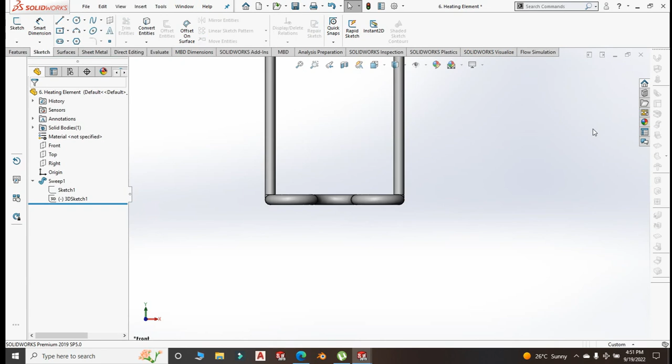But hey, just please bear with me. I'm sure these 2 points are not aligned, but at least you've gotten a complete overview of how a fryer looks like. What will be remaining here is to create a cover for the fryer, for the heating element. Okay, we will fix this at a much later date, which I don't know.

Let me mirror components. I don't know whether it will work. Nah, it can't work. Delete, close.

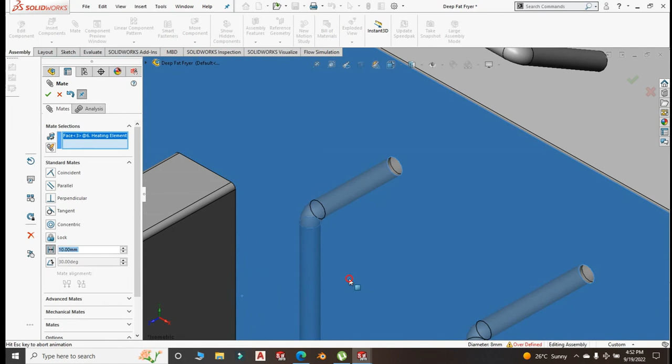I will insert component and I will insert the heating element, then mate concentric between this and this. Then distance of about 10 mil from here to here, 10 mil. Then I will leave it at that.

Then I will insert again, insert the elbows, browse, elbow 1. I should have inserted everything. Mate, concentric relationship, concentric between this and this hole. Yes. Then between this and this, not concentric but coincident relationship. We'll go for coincident, this and, yes.

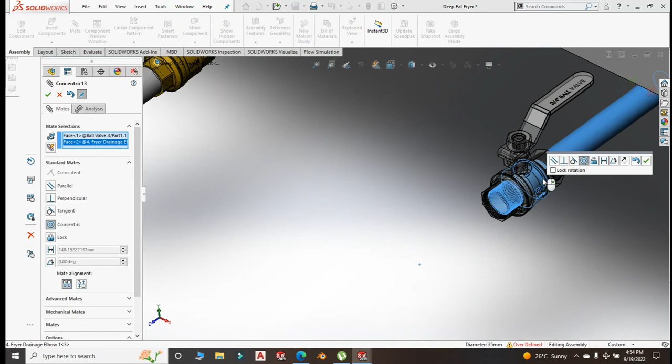Let me insert, browse. I will go for the ball valve, and I will make a concentric relationship between this and this. I don't know whether if I make coincident, I choose this face and this. I'm not sure, let me make another relationship between this face here and this face here.

What happened? No, we don't need to do that. Let me leave it at that. Can I mirror component? If I choose the right plane and mirror, then I mirror this elbow.

Yes, there are some errors here and there because of that heating element. The heating element is giving us all sorts of problems. Save. Finally, we are going to do the element covers.

Element cover, we measure between this and this. That is 284. 284 by what? This and this is 538. So 284 by 538.

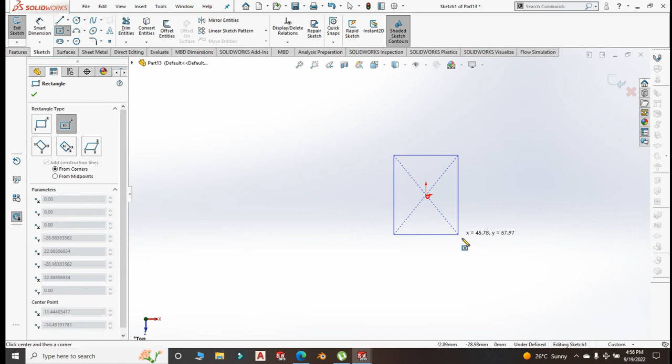New part. Okay, top plane, origin, center rectangle to the origin. 284, we can do 285. Actually 284, we do 280. By 538, we can do 500. Sheet metal base flange.

1.5 is okay. Then edge flange here, the three sides. Actually, you need edge flange two sides. Delete this side, and this you can make 20. You don't want the element touching the bottom of the well.

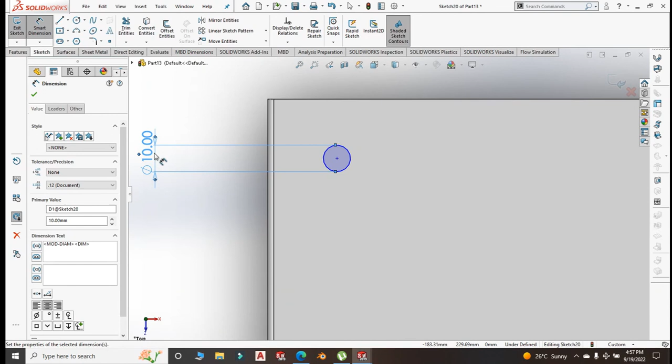15 millimeter, that's good. Then you want to create holes. Diameter of the hole can be 10 millimeter. 10 looks small, make it 20. Then from here to here you can do 30, and from here to here you do also 30.

Then you go to feature and extrude a cut. Click OK. Then from there you choose linear pattern. Direction is that. Component to linear is the extrude cut all. You change direction, make this, is it 50? Will 50 be good? Then you increase the number of holes.

Then direction 2 is that one. Make this 50 also. Then increase the number of holes to something like that. You can edit accordingly to make sure that the holes are centered on the plate. Then save this and call it.

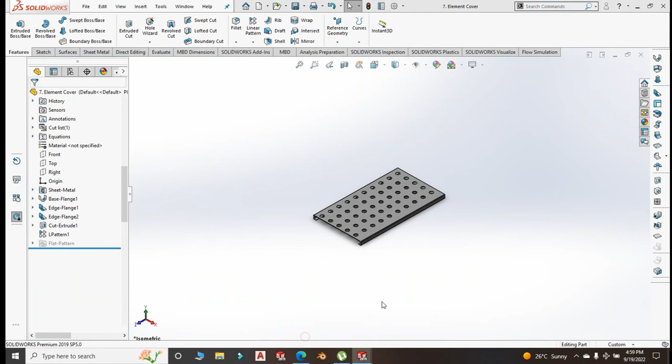Part number 7, element cover. And with this, I believe our fryer is done. Fryer is done. There are some mates that I should add to ensure that this thing is not oscillating like this.

See? I will add it a bit later. Simply insert element cover. There we go. Mate.

I will go to plane 1, that is the back cover. Back cover, we go to plane number 1. Then element cover, we go for the right plane. Click OK. Then I will do what? Choose this and this. That's okay.

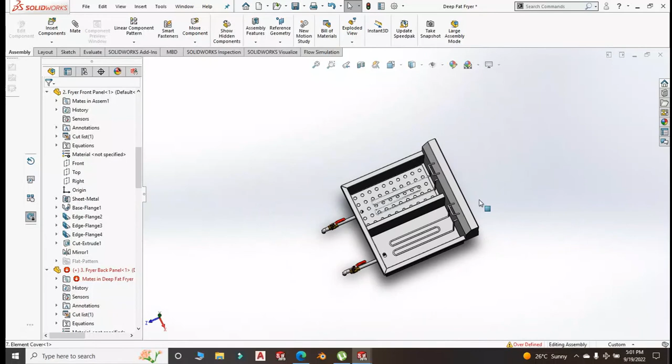Then I will choose advanced method, go for width, that is between this face and that face, this face and this face, and your element is covered. Ideally that is how you go about this thing, and that cover is removable.

Mirror, will this give us troubles with the mirror? The bends are good. Okay, now I choose this open, and when that is opened, let me see this. I edit 149.5. Okay, so I'll go for right plane and reference geometry plane 149.5. Yes, and hide the plane.

Then go to the sub assembly. Then I will choose. All the errors are coming from the element. Then I will go for mate. I will mate.

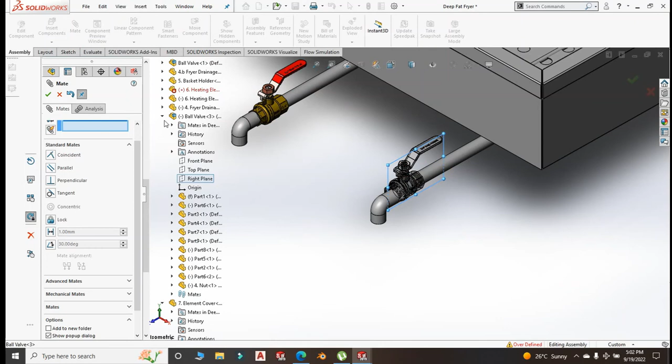If I choose plane 2 of the back cover, plane 2, and I choose the ball valve, go for the right plane, that should align a few items. Then I need to choose the right plane of the ball valve and the right plane of which elbow. No, we are having problems with this because I didn't insert it.

I mirrored it. Don't worry about the errors. Once we fix the element, the errors will disappear, the errors in the mating. So this, we go to mate, concentric relationship, concentric between this and this.

Then can we go for coincident between this and this? No. Actually, we go to plane 2, or not element cover, but this ball valve, right plane, and right plane.

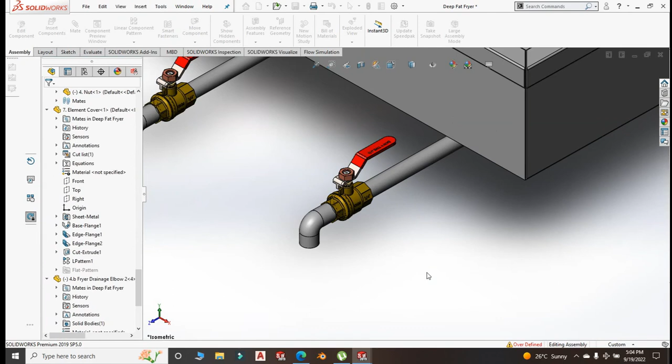We are having problems. I will leave it at that. Now the fryer is good. The only problem we have is with the heating element. That element is giving us all these problems.

So bear with me, guys, I will fix the elements for you and the errors will be gone. Let us check from the main assembly and see if our thing is good. So in a future video, we are going to fix the element and fix these holes.